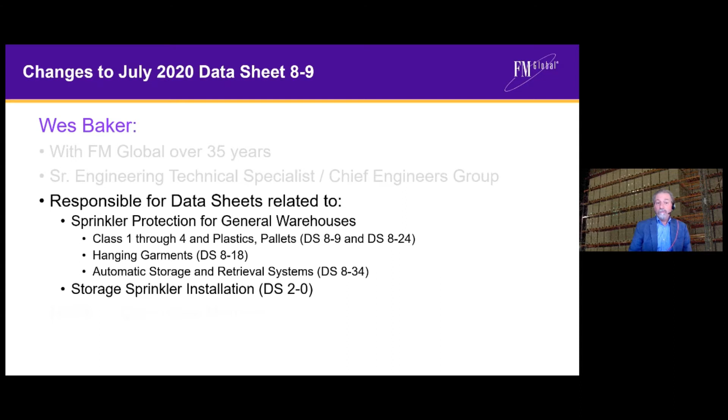The data sheets I tend to handle the most are Datasheet 8-9, Datasheet 8-24, which is for idle pallets. I also handle hanging garments in Datasheet 8-18. And most recently, if you've seen some releases, we also have Datasheet 8-34, which I'm responsible for, which is for automatic storage and retrieval systems. In addition to the designs for general warehouses, I'm also responsible for sprinkler installation. And for storage protection, that comes in the form of Datasheet 2-0. Similar to Steve, I'm also a member of NFPA 13, handling both the discharge and installation committees.

And FM Global, as an insurance company, can you talk about why the property loss prevention data sheets are important to FM Global? Certainly. Let me start with what data sheets are. For FM Global, data sheets are basically our best advice to our clients with the goal of reducing or eliminating property damage or business interruption. Now, it's important to realize our data sheets offer recommendations as opposed to requirements, since our data sheets are not code. Most codes address life safety, whereas FM Global data sheets address property conservation.

Their intent is really for new construction or existing facilities that are going to be renovated. Now, one of the benefits to our clients is if they incorporate the recommendations that we have in our data sheets, it gives them the opportunity to obtain their lowest insurance premium from us. In those data sheets, we have an interim revision just released on Datasheet 8-9 in July. I think there was one about 6 months before that. How are those updates and those revisions to the data sheets developed?

When it comes to the development of FM Global data sheets, we have what we call subject matter experts, and they're the ones that are responsible for the content of the data sheet. And those are, like myself, within the Chief Engineers Group. But we don't do it alone. It's a very collaborative effort within FM Global. I have a support team that involves many representatives from different departments that help us with that. Now, the content and the recommendations basically are based on three things. We first of all look at loss history, and that usually entails any loss history that might involve the last 10 to 20 years, just to see what's driving losses.

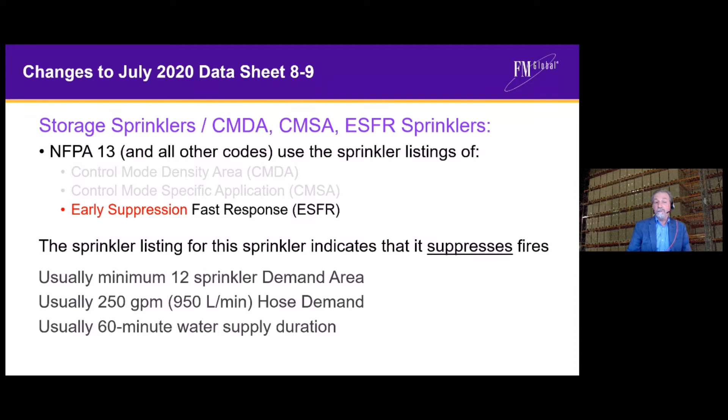And because of this type of performance, you can usually get a smaller demand area. It's typically 12 sprinklers. The hose is smaller. It's only 250 gallons as opposed to 500. And the duration of the water supply is usually 60 minutes as opposed to 90 or 120 minutes.

But in the same question I asked before, is there really a difference between control mode and ESFR sprinklers? Let's take a look at some of our full-scale fire testing that we've done. So I'm going to show you a video. In this case, the commodity that we're going to burn is cartoned non-expanded Group A plastic. Our storage height is 20 feet under a 30-foot high ceiling, and our aisle width is 8 feet.

So let's go ahead and see what happens during this fire. You can see we've started the clock, so the ignition has taken place. At this point now we can see the fire is growing up through the rack, and it's going to be reaching the ceiling here any second now. Our first sprinkler has operated, and based on the timing of that sprinkler and the droplets and the momentum of the fire plume and the water coming down, we're going to actually suppress this fire.

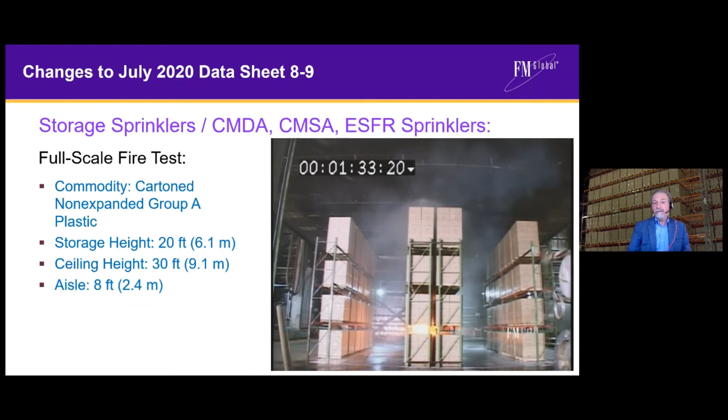Okay, so in this case, you can see there's minimal fire damage, minimal smoke damage. And what we had was one sprinkler that opened and suppressed the fire. So what type of sprinkler was installed at ceiling level? I think many of you might be surprised to find out that it really was a control mode density area sprinkler. Okay, well, as we mentioned, those are supposed to control fires, not suppress them, but that was not the case in this situation.

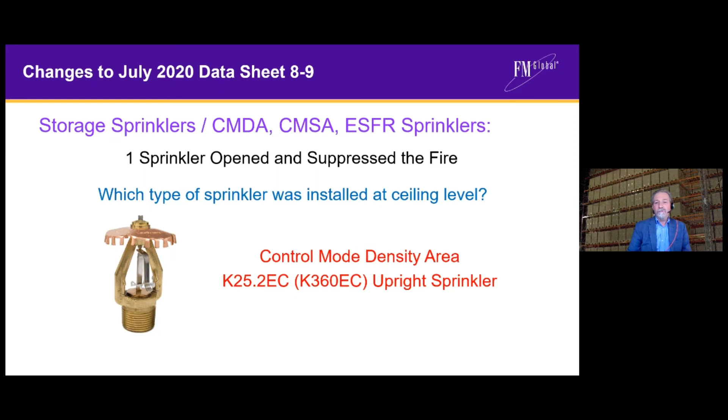So let's look at another test. In this case, what we're going to show you is a commodity that's lightweight roll paper. It burns very quickly. In this case, we have a standard arrangement on end paper up to 25 feet high under a 40-foot high ceiling. Now, whatever you do, don't blink. We've started the fire, and here it comes. It's not going to take very long. We're going to have that fire up at ceiling level, causing many sprinklers to open up.

And at this point, after 43 seconds, we've opened 16 sprinklers. And you can see I've got a tremendous amount of flame at the ceiling. I've got a lot of smoke being generated. In fact, it's going to block our view here in a second or two. But what we'll do is we'll fast forward the video up to around the 3-minute and 15-second mark. And as you can see, that fire is still going pretty strong.

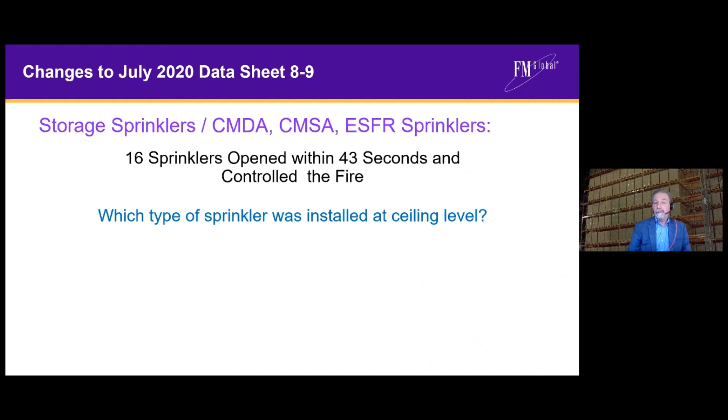But what's happening in this fire is that those 16 sprinklers that operated are actually pre-wetting the surrounding combustibles and controlling that fire. So in this case, we opened up 16 sprinklers within 43 seconds and controlled the fire. Let me ask you again, what type of sprinkler was installed at ceiling level? Again, I think you might be surprised to find out that it actually was an early suppression fast response sprinkler.

So what we have found through our testing at FM Global is that we've seen control mode sprinklers that actually can suppress fires. We've seen cases where suppression mode sprinklers don't suppress, but they control fires. So we've seen cases where sprinklers really don't perform according to their assumed performance. So what we have done at FM Global by going to our listings of storage sprinklers, we've indicated the use based on what the intended use is, as opposed to assumed performance. And what this does, it allows us to design our sprinklers based on the actual performance they obtain during their full-scale fire testing.

So I'm going to move ahead a little bit and get into some of the updates that have happened in Data Sheet 8-9 as of July 2020. And one of the significant items that we'll notice in Tables 2 through 11, which are the ceiling sprinkler design criteria tables, is that there's now a lot more options where we have a 9 or a 10 sprinkler hydraulic design. And that's one that was discussed also in the recent committee meetings on NFPA 13.

FM Global's gone and made some changes to Datasheet 8-9 related to that. Can you tell us about how the changes in the 9 and 10 sprinkler hydraulic designs that are new in tables 2 through 11, how those came about?

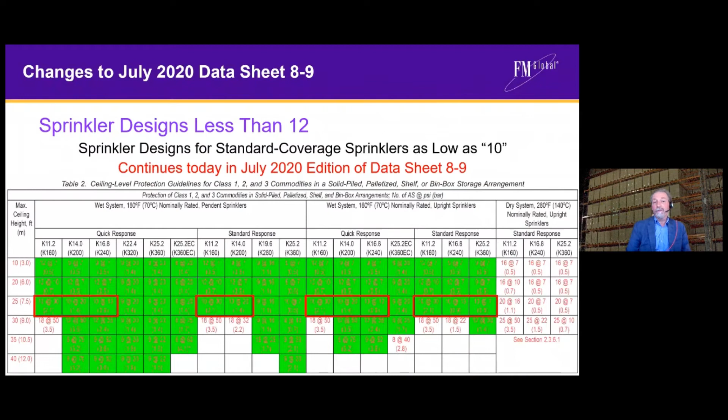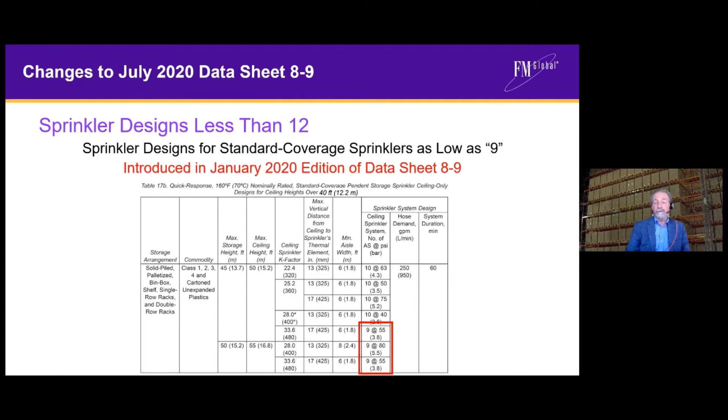In this case now, if we're looking at sprinkler designs for standard coverage sprinklers as low as 10, that was first introduced in our June 2015 edition of Datasheet 8-9. And we have added more to those today in the July 2020 edition. For standard coverage sprinklers as low as 9, those actually were introduced last January in our edition of 8-9 in table 17B. And now today, we have even more of those available to us.

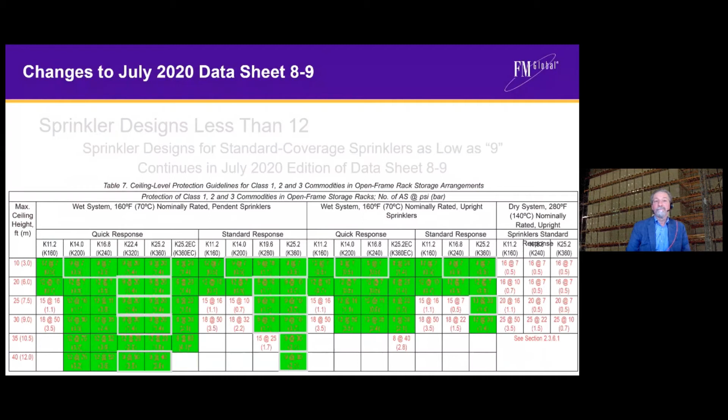Okay, and when we see those tables, there's another significant change in tables 2 through 11, where some of those tables used to go up to 45 feet for the maximum ceiling height. And if we look at the table in front of us here, for example, it stops at 40 feet. So why did that change come about?

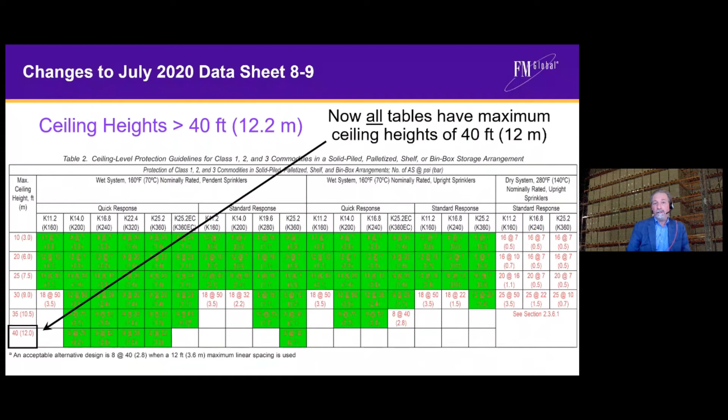Yeah, in previous editions of Datasheet 8-9, we had some tables that went all the way up to 45 foot high as far as the maximum ceiling heights. And there were others that stopped at 40 feet. So what we've done now with today's version of 8-9 is set it so that all the tables have a maximum ceiling height of 40, so they're consistent across the board.

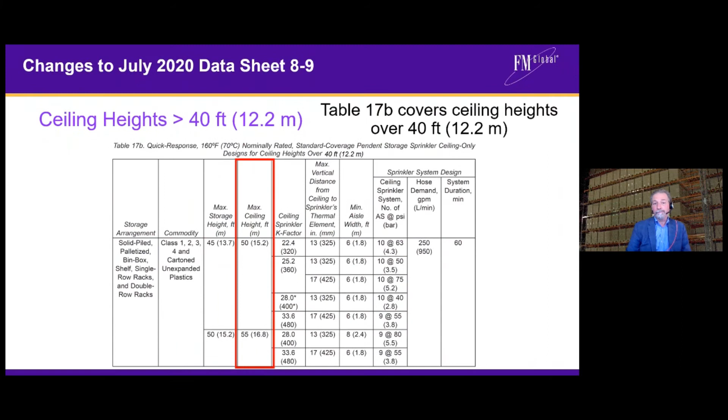So the question comes, where do I get my ceiling designs for ceiling heights over 40 feet? Well, we have a table specifically for that. It's 17B that covers all ceiling heights now over 40 feet. Now, when you go back to our January 2020 edition of 8-9, the designs for some of the 45-foot high ceilings were actually removed in our July 2020 edition.

Now, that came about based on the review of our test data that brought about concerns with the current 45-foot height ceiling designs. Some people might ask, well, what concerns do you have? Well, let me go into the factors that can affect full-scale fire test results. The first one we look at is moisture content of corrugated cardboard.

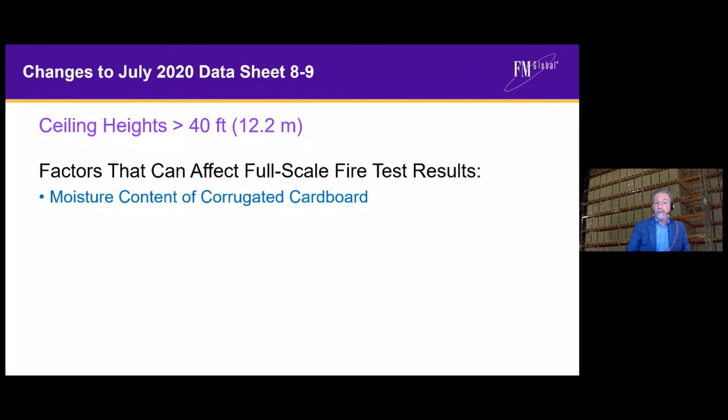So if you have a cardboard box that you're storing stuff in a warehouse, that can be affected by moisture. And it's driven by the relative humidity of the environment. And what that does is affect the heat release rate of the fire. As you have a higher moisture content, it results in a slower growing, less challenging fire.

Now, we found out about this when we did some large-scale fire testing using simulated dry systems. So we realized that Mother Nature was influencing our test results. So back in the late 2000s, FM Global spent a lot of money to upgrade our large burn lab and installed industrial-grade dehumidifiers to condition the lab area. That means we have a moisture content that must be within spec or the test is not conducted.

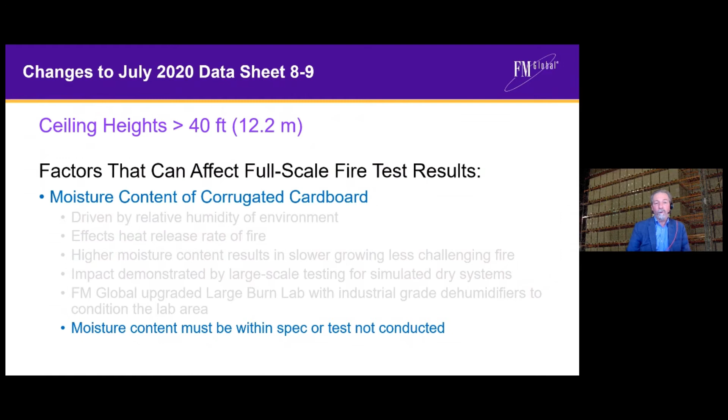And with the help of those dehumidifiers, we can usually keep our moisture content where we need it to be. The other factor that might affect a full-scale fire test is the ignition location. Now we have two different types. The first one I'm going to talk about is the offset ignition location.

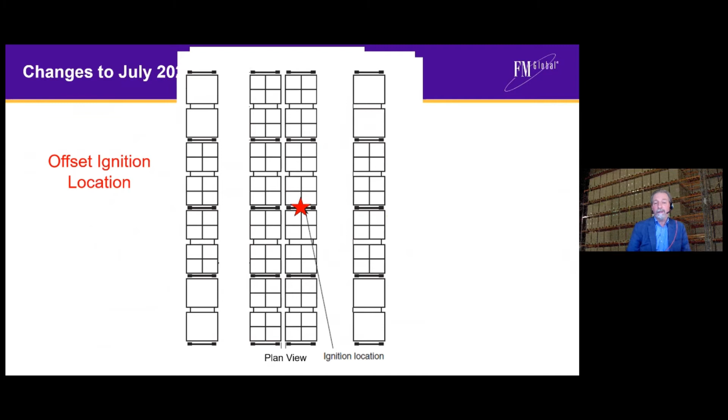And if we're doing a rack test, we typically have it at a rack upright. So here's a plan view of a storage array involving rack storage. Now, when I'm referring to an offset ignition location, that's really the location of the fire within the rack itself. It's located in a transverse flue space, basically halfway between the longitudinal flue and the face of the rack. And for rack storage, we put it at a rack upright as well.

Non-offset ignition location is similar, except what you're doing now is you're just moving the ignition over to the intersection of the longitudinal and the transverse flue space. Now, what we've found over time is that the offset ignition location is more challenging than a non-offset ignition location, sometimes much more challenging. So what we did for the July 2020 edition of 8-9 is we went back and we looked at every single design in tables 2 through 11.

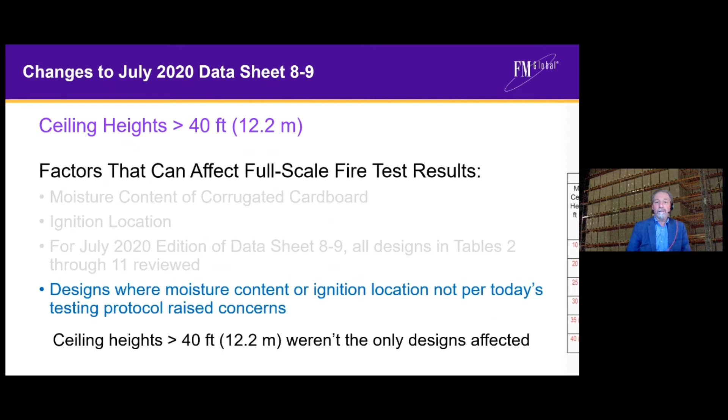They were reviewed. And those cases where we found designs where moisture content or ignition location were not per today's testing protocol, that certainly raised concerns. And it's not only for ceiling heights greater than 40 feet. So if we go back and look at some of our other tables, such as table 5, if you looked at the 2020 January edition, you'll notice in the July edition, there's some designs in table 5, which is on-floor storage of exposed non-expanded group A plastic.

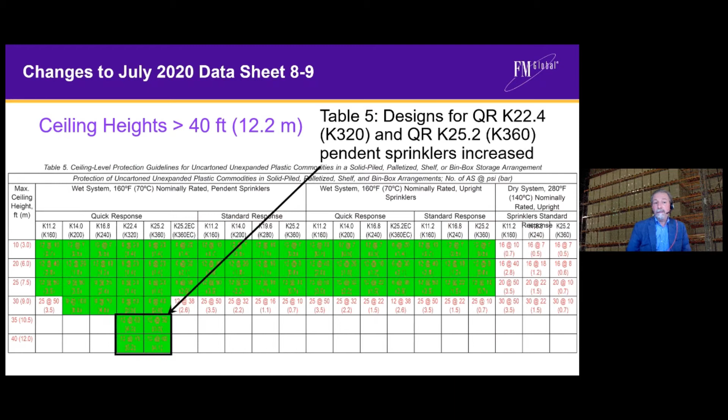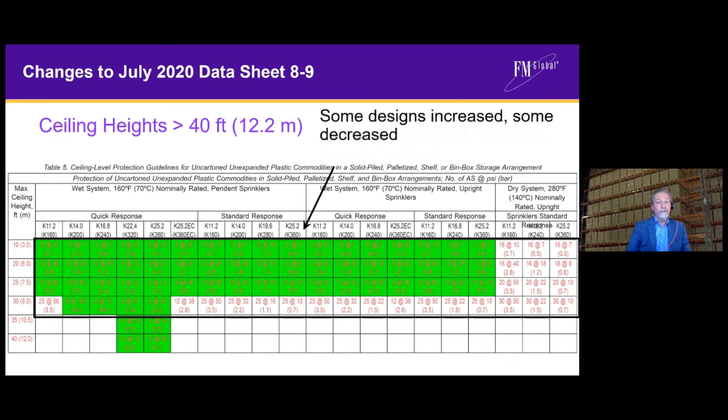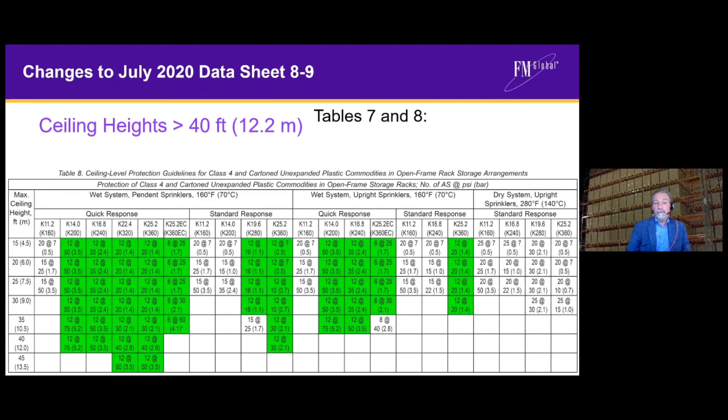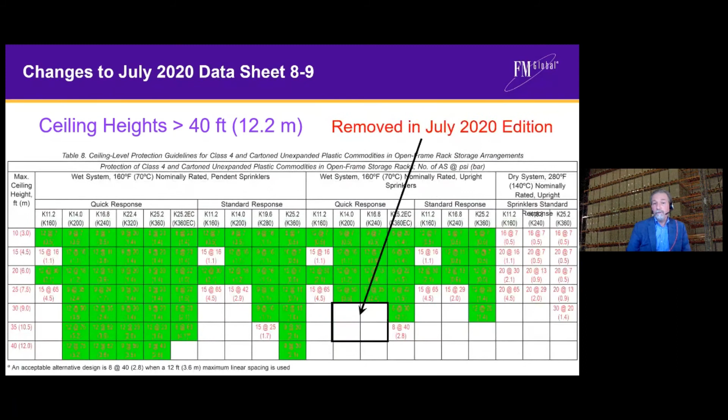We've removed some designs. And when you look at the designs that are still there for ceiling heights over 30 feet, those were actually increased. And even those for 30-foot high ceilings were looked at, and a lot of them might have been changed. Some designs were increased, some of them actually decreased. Same in tables 7 and 8, which is class 1 through 4 uncartoned unexpanded plastic or cartoned non-expanded group A plastic. When you look at some of the designs that were available for the quick response upright sprinklers, those were removed in July.

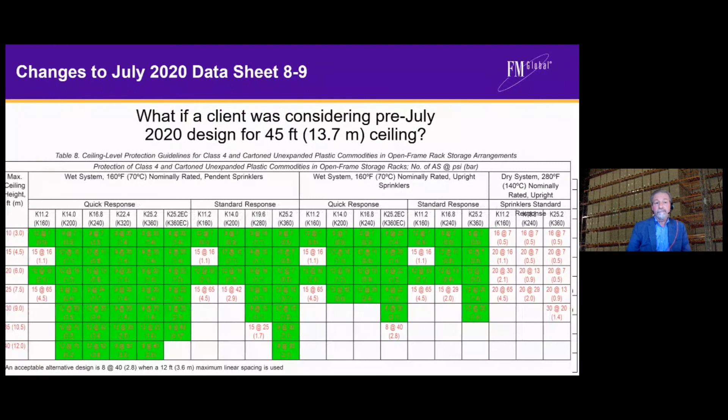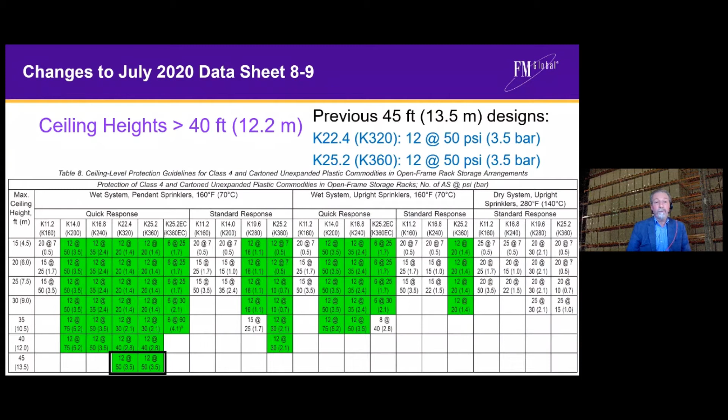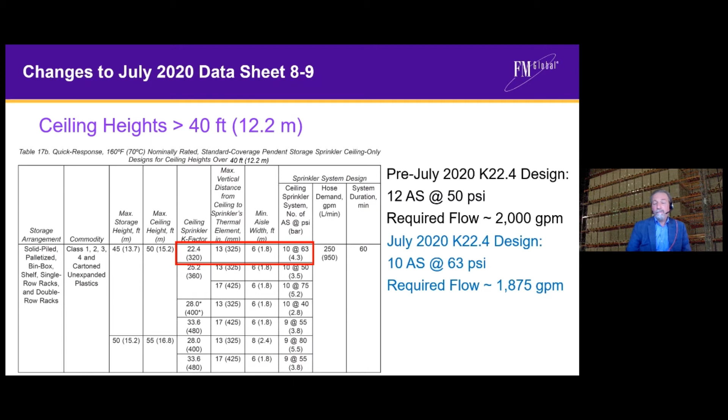Now, I get a lot of questions that say, well, what if a client was considering a pre-July 2020 design for a 45-foot high ceiling? Well, if we look at the previous designs that were available in, say, table 8, they were basically a K22.4 using 12 sprinklers at 50 psi, or a K25.2 using 12 sprinklers at 50 psi. So if we look at table 17B now, where our 45-foot high ceiling designs would have to go to, if we use the previous design that was available for the K22.4, that required flow is about 2,000 GPM. And now, based on the July 2020 edition, the design is actually less. The pressure is higher, but the flow is less.

One thing you have to note, though, that's different is that we have to move the thermal element closer to the ceiling than we had before. That was 17 inches. And now we bring in aisle width. So before you didn't have to worry about aisle width, but now you have to make sure that the client has an aisle width of at least 6 feet or wider. If I look at the K25.2 design, the flow was about 1875 today. So it's still less flow, same pressure. But again, that thermal element has to be a little closer to the ceiling, and we have to look at aisle width.

There's another design too for the K25. It's 10 at 75, so it's a higher pressure. The flow is about the same, but the nice thing about this is it does allow the thermal element to stay at the 17 inches that you would have had in table 8, but now you've got to bring in aisle width, so that's a minimum of 6 feet wide.

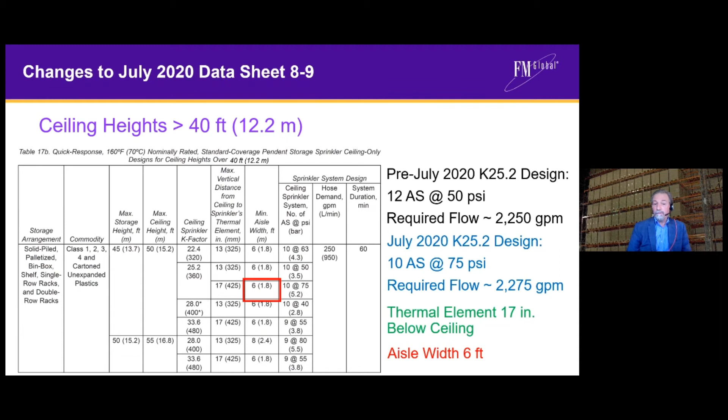So when we look at the major changes, it may not be all that bad, as long as it's okay to install that sprinkler element 17 inches as opposed to 13 inches. And for our open frame racks, we're having a minimum 6 foot wide aisle available for single and double, and actually it will be multiple row racks.

Okay, so in terms of the fire protection industry and these types of buildings that are built out there, I think those changes are significant. If we go back 20 years ago, for example, storage buildings were typically not as tall as they are today. We had a lot of maybe 29, then we went to 32, then up in the upper 30s, and now we see a lot of storage buildings that are built in that a little less than 45-foot range.

So we see that criteria used a lot, and one of the things I think we're going to, as an industry, have to deal with, and we've had some discussions with some engineers and some contractors about this, is that we'll now see some differences between the criteria in FM Global Data Sheet 8-9 and the criteria in NFPA 13. And in certain locations where you might not have a locally adopted requirement, maybe the designer would just use FM Data Sheet 8-9 and that would be how they do it.

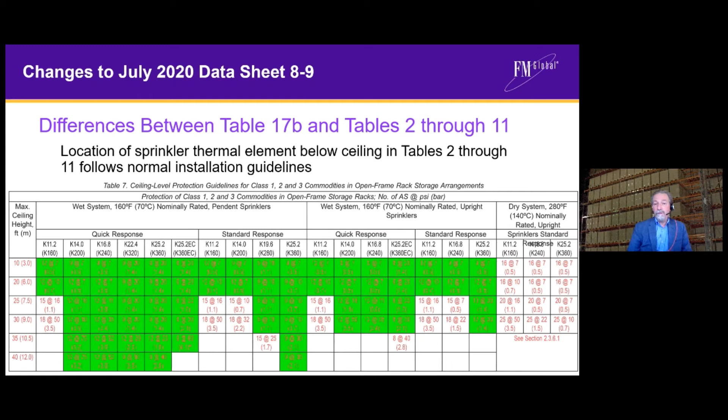And also, when you look at Tables 2 through 11, the location of the sprinkler follows normal installation guidelines. That means traditional K14s and K16.8s can be as low as 13 inches below the ceiling to their thermal elements, and larger sprinklers have the allowance going all the way down to 17 inches below the ceiling. But now when you look in 17B, a designer is going to have to take into consideration what the maximum vertical distance is below the ceiling.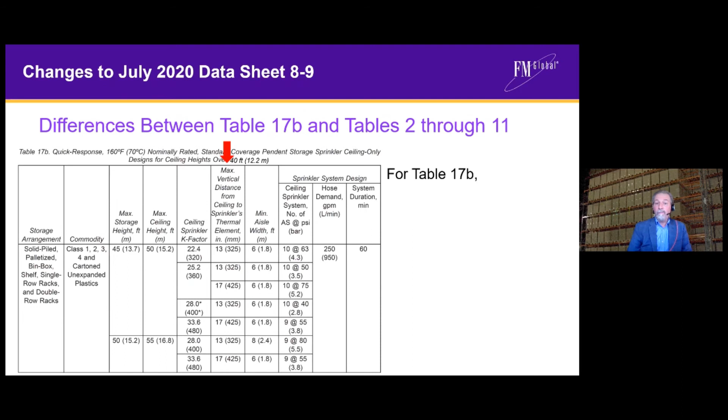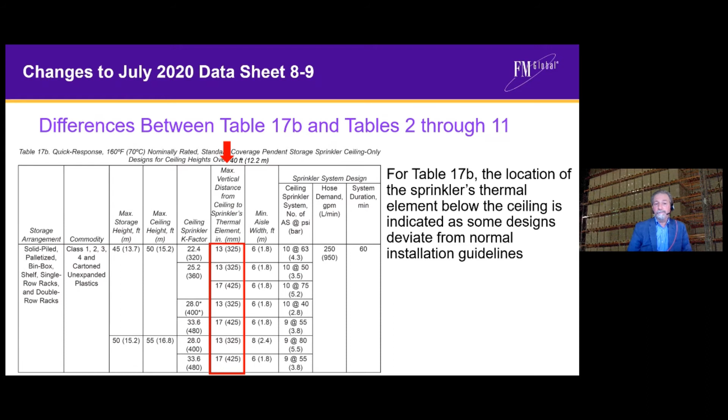So now it might vary. For example, there's cases where a K22.4 or a K25.2 that traditionally is at 17 inches now has to be limited to 13 inches. And why is that? Well, when you look at a typical fire, what you have is a vertical distance that thermal element can be located below the ceiling.

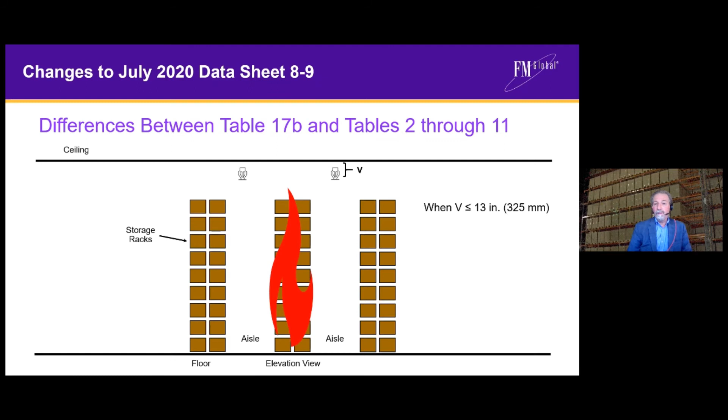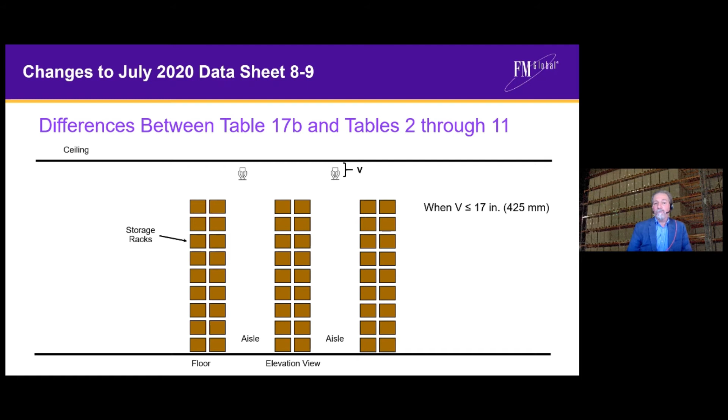So when we have that fire take place and the sprinklers operate, the closer that sprinkler is to the ceiling, the more likely it's going to operate in timely fashion and get water onto that fire while the fire is relatively small. But now if I increase that distance below the ceiling, it takes longer for that heat plume layer to build up under the ceiling, and it allows the fire to get larger.

So when the vertical distance increases from 13 to 17 inches, you have a more likelihood that the fire is going to get larger and less likely that the sprinklers might operate in a timely fashion to provide an acceptable level of control. So those are the things, going forward, that the designers have to really take into account to make sure that the designs now in 17B are properly implemented.

And so we've talked about the changes to 8-9 related to design number of sprinklers, storage height, and how those might apply. One other question that's come up in the chat is, now with the 9 and the 10 sprinkler hydraulic designs, how many sprinklers are you required to calculate on each branch line? How is that design area determined?

Very good question. In fact, for the case where you're using table 17B, datasheet 8-9 actually gives you the guidance on that. So if it's a 9 sprinkler design, it's 3 sprinklers per branch line. It's that simple. If you're looking at 10 sprinkler designs, then the ceiling slope comes into play. So you would have to see if the ceiling slope is 5 degrees or less.

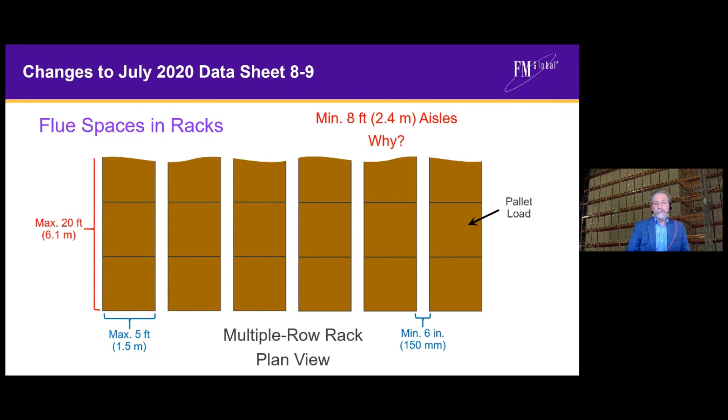Somebody might ask, well, where did this come from? Why are we limiting it this way? Well, we're actually going to go all the way back to 1971. There was a multiple row rack test conducted that created the way we provide designs in NFPA 13 as well as FM Global Data Sheet 8-9; it's all based on this test. So back in 1971, what they tested was 6-inch wide transverse flue spaces located roughly 5 feet apart horizontally.

In this case, we had 4 pallet loads deep. And traditionally we assume the pallet loads are nominal 5 feet. So if you take the 4, multiply it by 5 feet, that's where you get your 20 feet. And in the test, we actually used a 10-foot wide aisle. But at this point, we're using some judgment to allow it to be 8 feet. So therefore, our new flue space guidelines represent those that were actually tested.

Now, we know that this is going to be an issue. So we're hoping to conduct some in-depth analysis of this storage arrangement in the near future. And when we do, we'll update 8-9 afterwards to incorporate whatever we find.

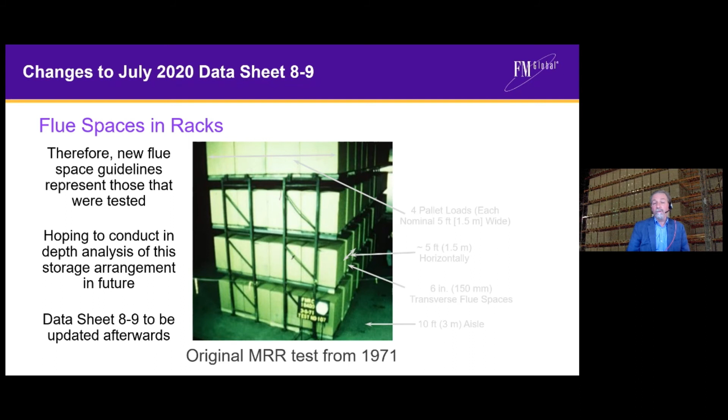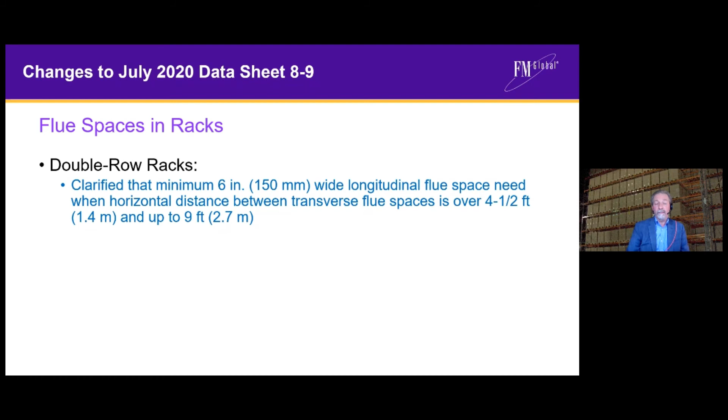Now, I did mention we've also made some changes to double row racks, and that was really more or less a clarification. The revised guidance clarifies that a minimum 6-inch wide longitudinal flue space is needed when the horizontal distance between transverse flue spaces is over 4.5 feet and up to 9 feet. Now, this probably came into play because FM Global does give you some guidance when there's no longitudinal flue. What it basically says is you can have something up to about 5 feet wide as long as you provide a minimum 6-inch transverse flue space between those pallet loads.

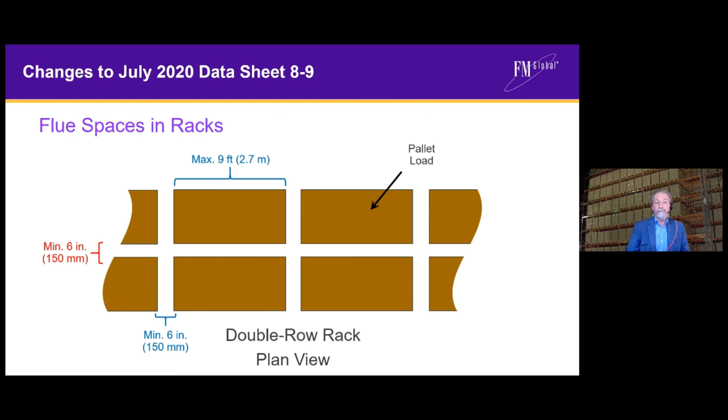Now, if by chance you turn the pallet load around and store it this way in the rack, now we have a maximum depth of about 9 feet between our transverse flue spaces, and what 8-9 says is you need a minimum 6-inch wide transverse flue space at that point. But what wasn't clear was that this means you have to have a minimum 6-inch wide longitudinal flue space to keep that, call it shelf area, limited in size.

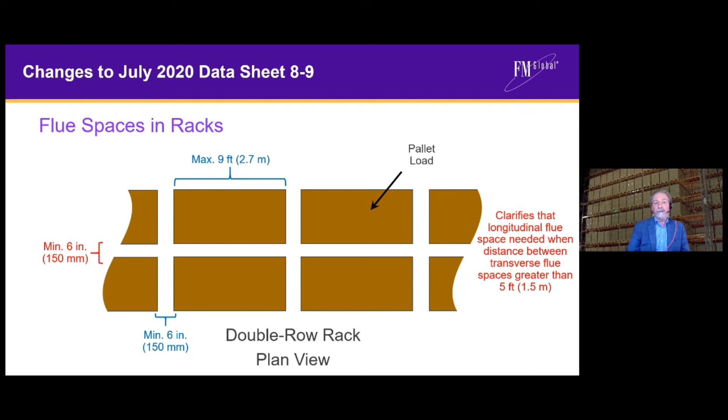So the new guidelines really clarify that you need to make sure you've got a 6-inch minimum wide longitudinal flue space when the distance between your transverse flue spaces is greater than 5 feet and up to as much as 9 feet. So the flue space guidelines help define when racks without solid shelves can be considered open frame.

And when the guidelines for the flue spaces are not satisfied, then our storage arrangement creates a solid shelf rack storage arrangement that typically means they need to be protected as if they have solid shelves. So those are the new guidelines that are currently in 8-9 regarding flues.

And as Steve mentioned, they're basically going to match what's in NFPA 13 when it comes to the multiple row rack requirements. And that still has a final vote to go in the 13 process. They're still not quite finalized, but everything that we've seen in the first draft and in some of the discussion that's happened with that is that it's heading towards being essentially the same, right? Maybe some minor wording differences, but essentially the same, which is going to create some challenges in the storage world and storage arrangements.

Or the other way to look at it is they'll create some changes in the protection arrangements to accommodate those storage methods, right? Which is the same thing with having a 6-foot aisle for storage over 40 feet with ceiling only. Well, you can protect more than 40-foot ceiling height areas with aisles less than 6 feet, just not with those ceiling systems. Right. Using the engineering. You would typically end up going to an in-rack system for that. Correct. Yep. So we'll segue there into in-racks.

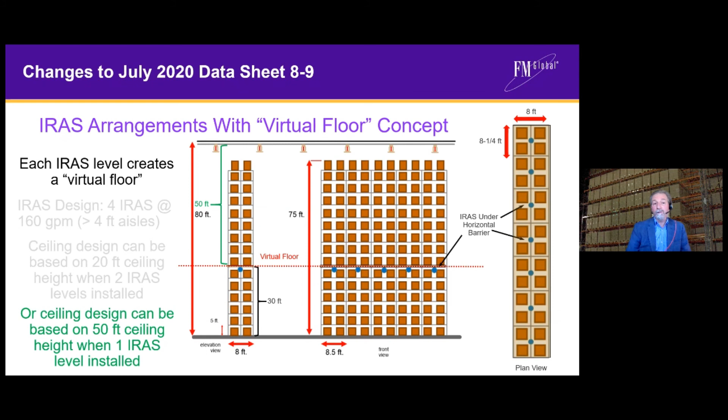You could also take a look and see, hey, maybe I can get by with 1 level. And so you would install 1 level at the 30-foot level and see if your sprinkler system can protect for a 50-foot high ceiling, or if there isn't any sprinkler protection there, you can design it. So it's based on 50 since we have those now available.

When it comes to option 2, that's the one that Steve mentioned includes the ESFRs. So in essence, you're looking at a 160-degree nominally rated quick response minimum K14 pendant sprinkler. Now in this case, the in-racks are installed both in the longitudinal flue and at the face for a double row rack. So typically for most commodities that we're trying to protect, you're going to end up with a maximum horizontal spacing of about 4.5 feet. So as you can see in the plan view section there, that's a lot of sprinklers.

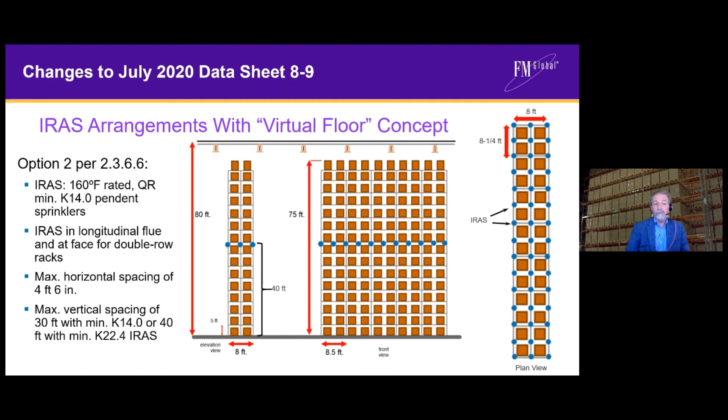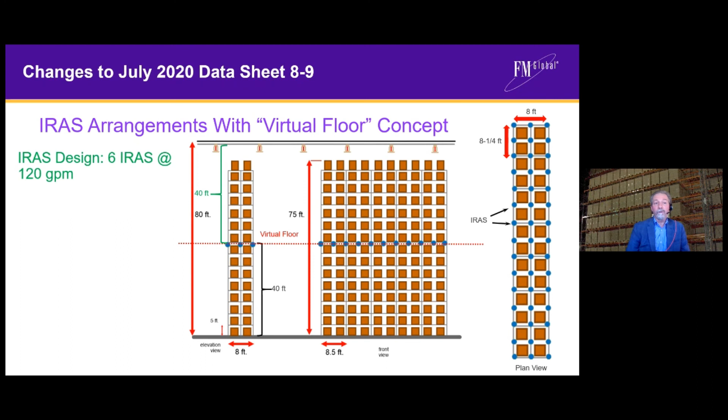But depending on the flow you decide to choose, you can either install your in-racks vertically at the 30-foot level, where you can get by with a minimum K14 sprinkler, or you can go as high as 40-foot between in-rack levels, but your minimum sprinkler has to be a K22.4. So if you go with 1 level of in-rack sprinklers, say you install it at the 40-foot level, your design would be 6 sprinklers at 120 GPM. And now your ceiling design can be based on a 40-foot ceiling when 1 level is provided. Again, you ignore anything happening below the top level, and you just simply base your ceiling design on what's left above the top.

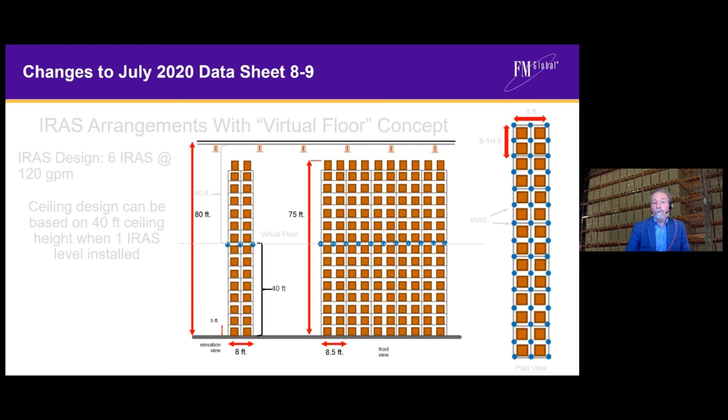Now, in the event that you decide, you can also put the same type of protection directly over top of the storage. In essence, take the ceiling out of play. If you do that, then 8-9 says you're simply designing your sprinklers to the surrounding occupancy, if that happens to be a challenge, or the minimum ceiling height that's indicated in 8-9. So it gives you multiple options of how to address protection with racks nowadays that are much different than the designs you were probably used to prior to these designs coming out.

Yeah, so that's some good additional information on that. Similar systems, not exactly the same requirements, exist in NFPA 13, and quite honestly, you did some great work in this last revision cycle in taking the 13 requirements and improving those from the 2019 edition to the 2021 edition, making them a little bit easier to understand and apply, and doing some of the updates that we see now in 8-9 on those types of systems.

And as things have developed in storage, more automation, we see more and more buildings that get beyond the 40, 50, 55 feet that we can protect with ceiling-only sprinklers, and we see a lot of them using a system like you show here on the screen with the virtual floor concept, some bigger K-factor sprinklers in the rack, and really making that more accessible in the storage arrangements.

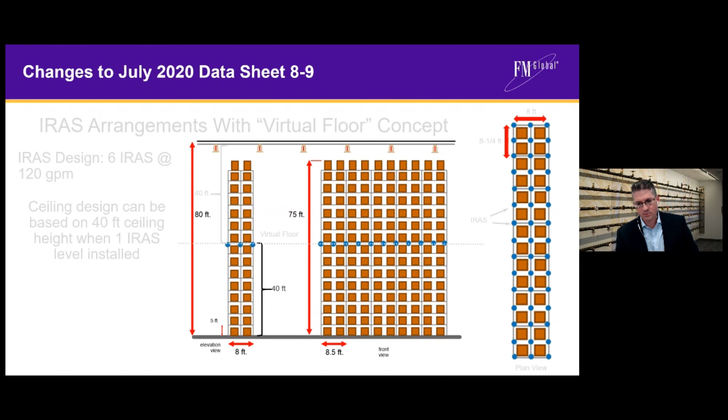So when it comes to potential future revisions to 8-9, one of the biggest things I'm hoping we can address soon is multiple row racks, because we're seeing a lot of the pushback type, the flow through, and because of the shielding effect those have when they don't have a longitudinal flue, it's defaulting us to what we have today in 8-9 and soon to have in NFPA 13. So I'd like to find out, when we do have those types of racks present, what is it that we need for protection? Because until we know, we're in essence defaulting to in-racks at every tier level, because it ends up with a solid shelf greater than 64 square feet.

We're also doing research in open top containers. And so hopefully once we finish our research on that, we'll have some better guidance to offer on how to protect them, and also how to turn them into not being an open top container hazard.

Also want to take a look at seeing how we can make it easier for the data sheet to be read and implemented. So we're planning on revising the format to incorporate a lot more figures, maybe some tables, flowcharts, so that we can reduce the amount of text that you have to read through. It makes it easier for the end user to end up in the right spot and make sure they haven't missed anything.

And one of the things that we're going to do is, as much as the data sheet's big now, it's going to get bigger because we're going to be incorporating some of our other data sheets that you find typically with a general warehouse, such as idle pallets or horizontal carousels, automatic storage retrieval systems. That's all going to be moved into 8-9 so that it becomes a one-stop place for general warehousing.

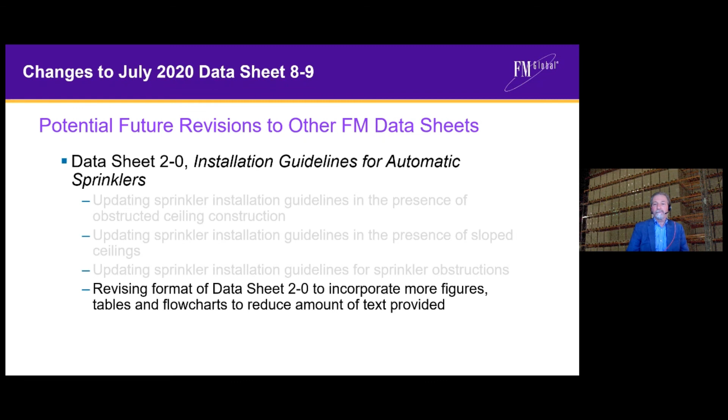In terms of presence of slope ceilings, we're currently limited to basically a 10-degree slope with our ESFR sprinklers. Well, based on testing we've done, we're going to be able to go to greater slope ceilings and provide guidance for what to do there. In terms of obstructions, we've done some testing through the FPRF, and so the results will be incorporated into 2-0 next year. And just like what we're doing with 8-9, we're trying to make it so it's easier to read, more figures, more tables, flowcharts, reduce the text. And that's coming out next year.

And one other thing that I'll talk about real quick is automatic storage retrieval systems. There's been a lot of testing we've done with those based on mini loads, top loads. So we're adding new guidance coming out next month for protection of top loading ASRS systems that use non-solid wall containers. Right now, the scope of that data sheet only addresses solid wall containers. So we'll have some new guidelines for those types of containers if you come across it.

The existing guidelines for mini load systems are being updated to account for use of non-combustible containers. And the same thing goes with top loading when you use non-combustible solid wall containers. And we've reformatted that data sheet so it's clear for the end user to understand what recommendations are based on sprinkler protection and what recommendations are specific to fire extinguishment.

Because with those types of systems, automatic storage retrieval, a lot of them make it much more difficult for the fire department to get in to where the fire is. So we want to make sure that the end user knows what it is that's geared specifically for protection and what is there to help the local fire services help put out the fire. And that's coming out next month.

Other storage related data sheets, one of the things we're going to be doing is updating those to make them more of the same style that you see in data sheet 8-9. And 8-9 does have the K28 and the K33.6 sprinklers in it, but a lot of the other data sheets don't. So we're going to be updating those data sheets to include those newly approved sprinklers. And again, trying to minimize the amount of text that's provided so it's easier to get through and find what your designs and recommendations might be. And that should cover it.